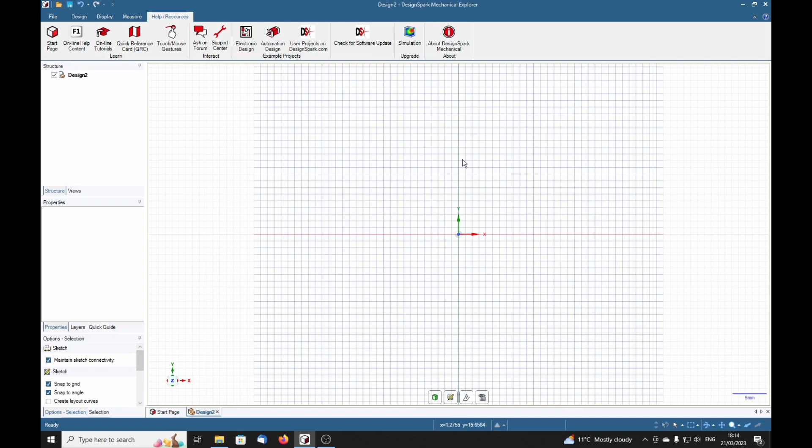So here we go. I'm going to model a Springbok 5-inch gauge model loco, and one chap remarked that he liked my driver wheel that I made a few weeks ago, and asked would I do some more on locomotives. So he will go with this one. So we'll go to our DesignSpark, and I've noticed no differences in here. Nothing stands out as being different. So we'll just continue and see how we get on.

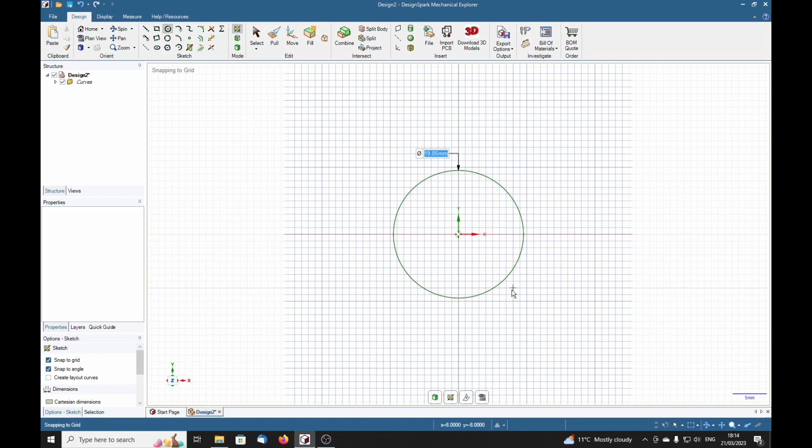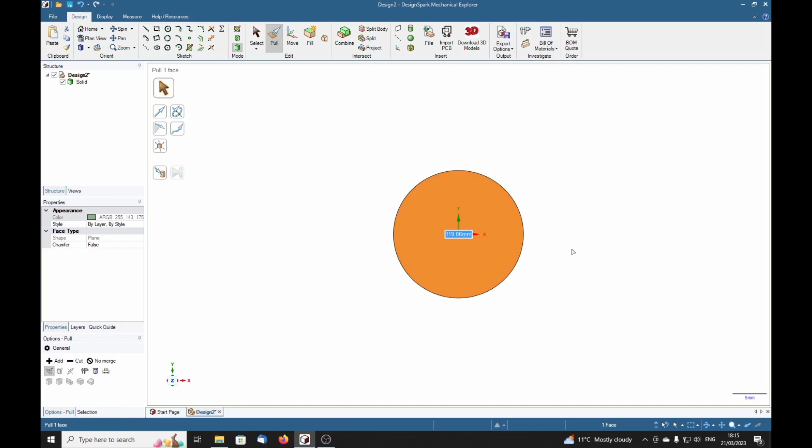I'm going to start with a circle. Now this axle main diameter is 3/4 of an inch, so we'll say 0.75 inch. Pull. 4.6875 inches. Let's have a look at that. Yes, that looks quite reasonable.

Now there's a couple of bearing parts on the end here, so it's like another circle. Now I've noticed, right, we've selected a circle, but the cursor does not have a hatch in it. So does that mean we can draw straight on here? Let's try it. Well, that looks alright.

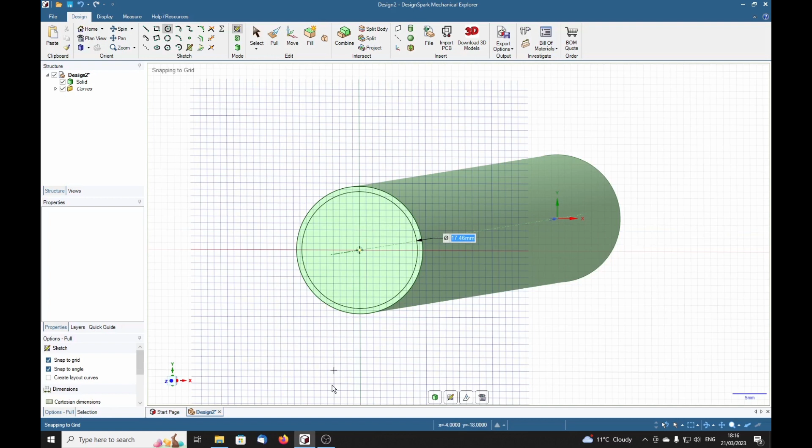And this needs to be 0.6875 inches. Okay, pull. And 11/32 long. Oh, what is 11/32 as a decimal? Point 343. 0.343 inches.

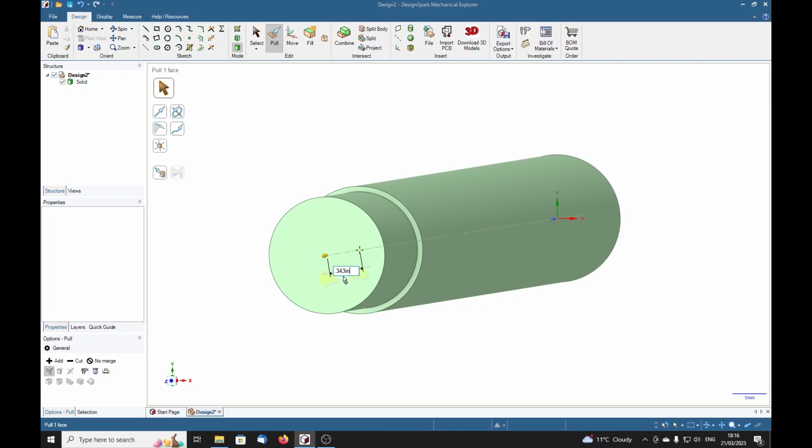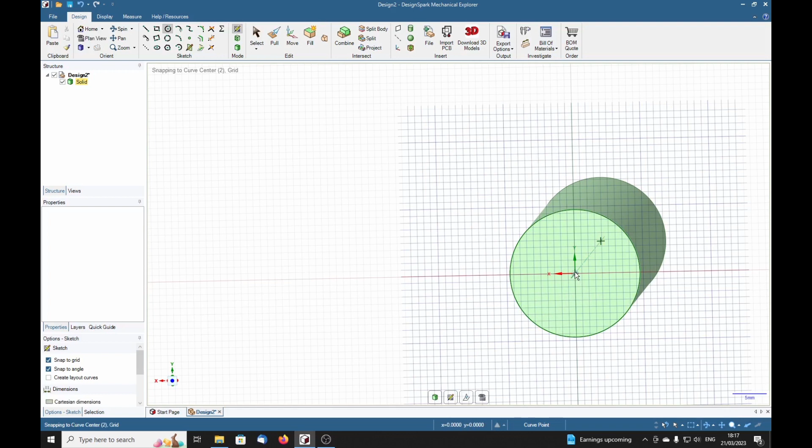Similarly on here, a circle. Oh, we have got a hatch in it. Wonder why it didn't have a hatch on the other end. Again, 0.343 inches. No, wait a minute, this is diameter 0.6. Come on, 0.6.

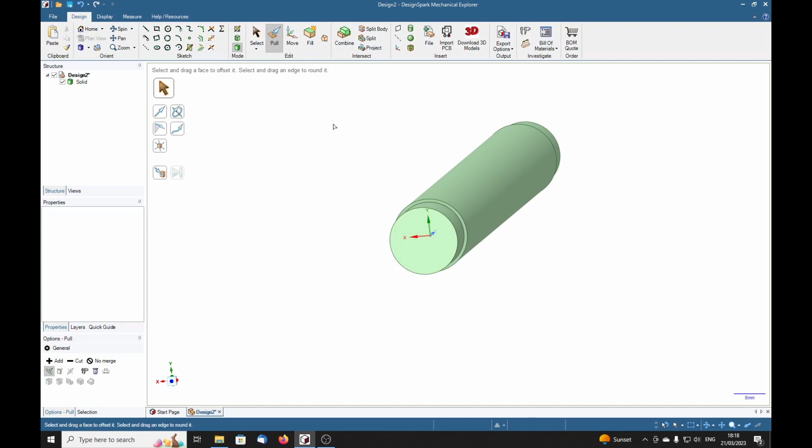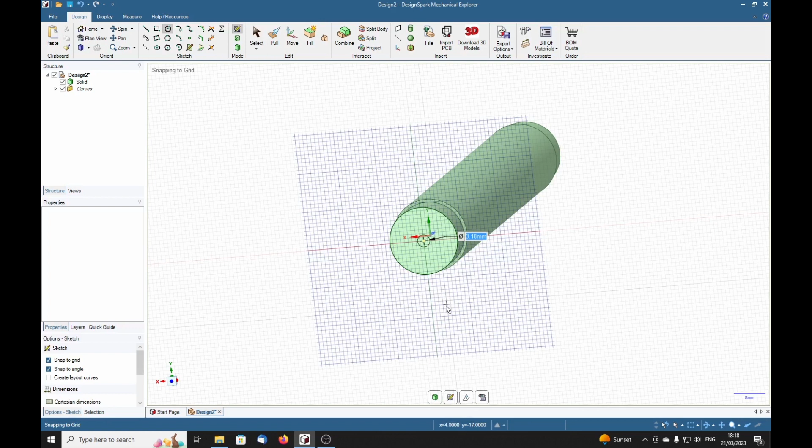So 0.125. Let's pull. And we'll drop that down about 3/8, 0.375 inches.

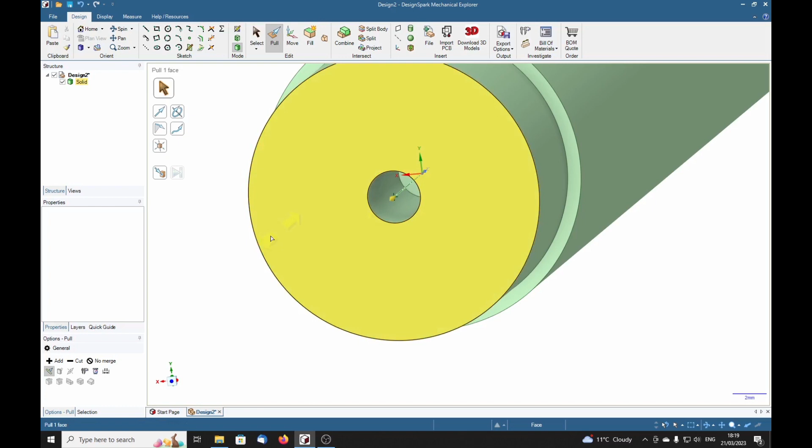Now to make this into a center drill type hole, we are going to use the pull tool. We'll select that bottom corner in there, make sure we've got the chamfer down here, the chamfer tool, and we'll say 0.0625 inches.

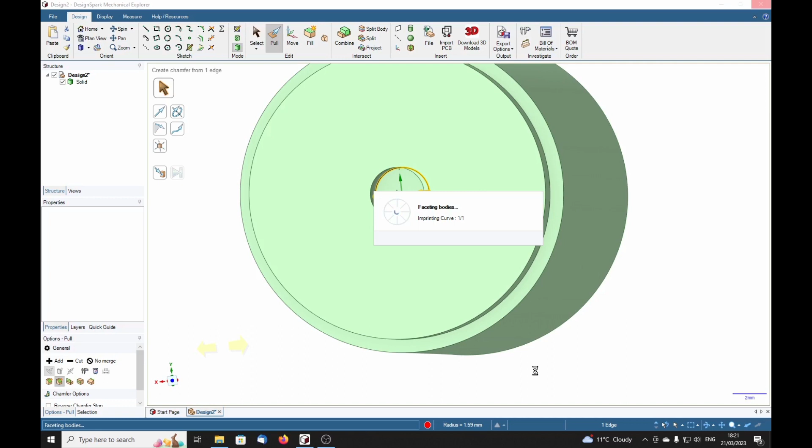Oh, this is new, normally it's pretty quick. Oh, this is not good. We can't be waiting all this time for a simple chamfer. Wait a minute, we've got something going on down here, look. This red thing looks ominous. Ah, right, it appears to have done it. Yes, I think we've got a drill point type recess in the bottom of that, but that took a while.

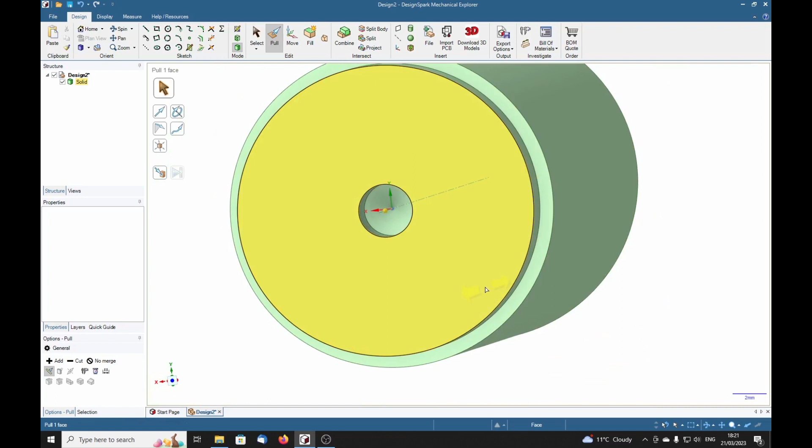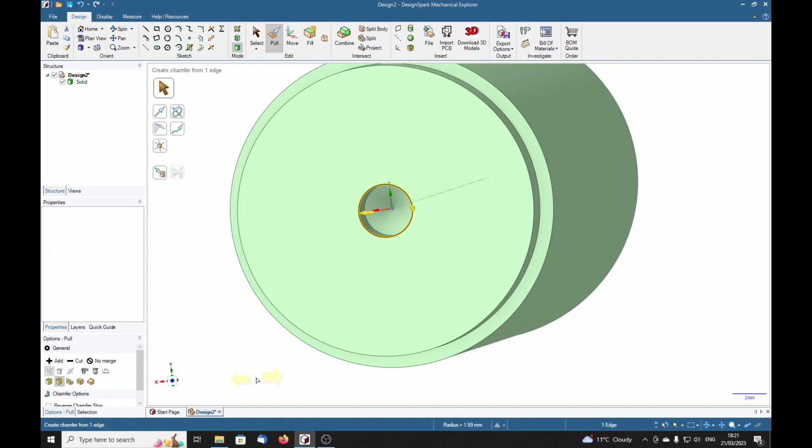Now we want a chamfer at the top. Let's see if this is going to... Now we've still got the chamfer, 0.0625 inches. Return. Oh, well, that's better, that's better.

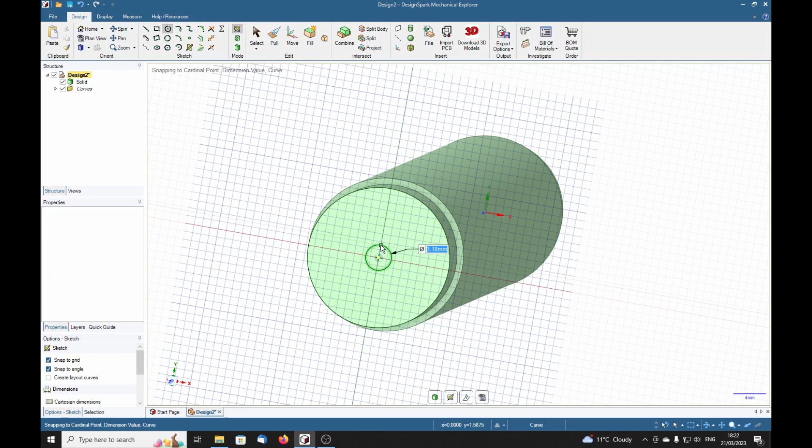Try this again on this end. Circle. Ah, right, yes. 0.125 inches. Pull. 0.375 inches deep. Okay.

We are... and we've got... oh no, we want to make sure we've got the chamfer. Right, that's the chamfer, on 0.0625 inches.

Maybe it doesn't like doing this right near the center of the hole, bottom of the hole. Maybe we need to find some other method of putting the pointy bit at the bottom.

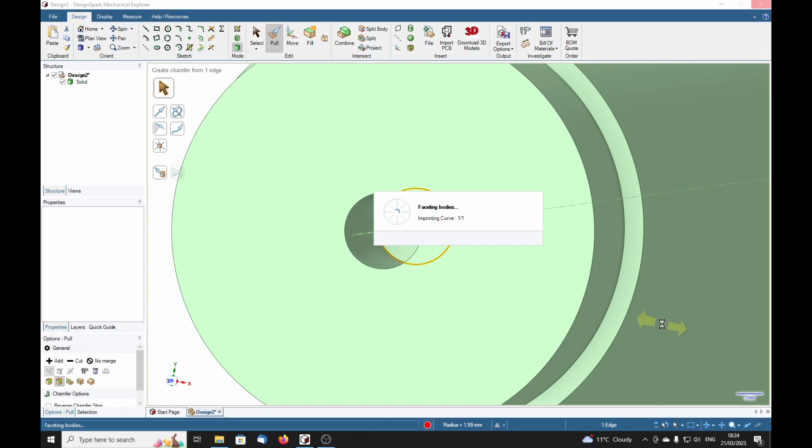That'll be the phone. Yeah, hello. Hello. Yeah, I was. I'm all right, in the middle of doing another video. Okay, bye.

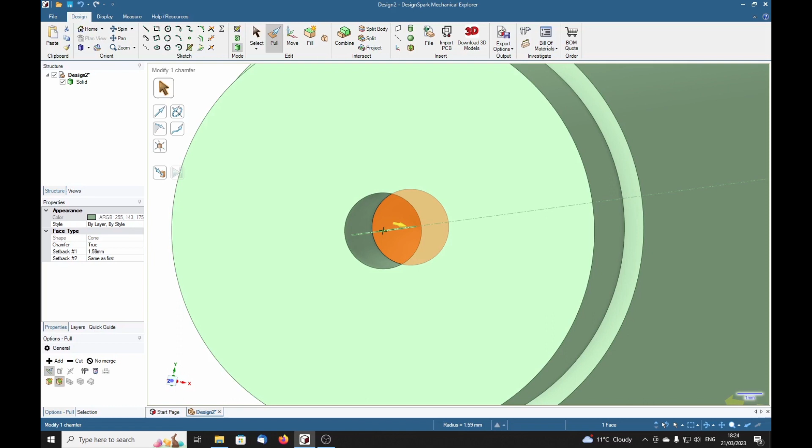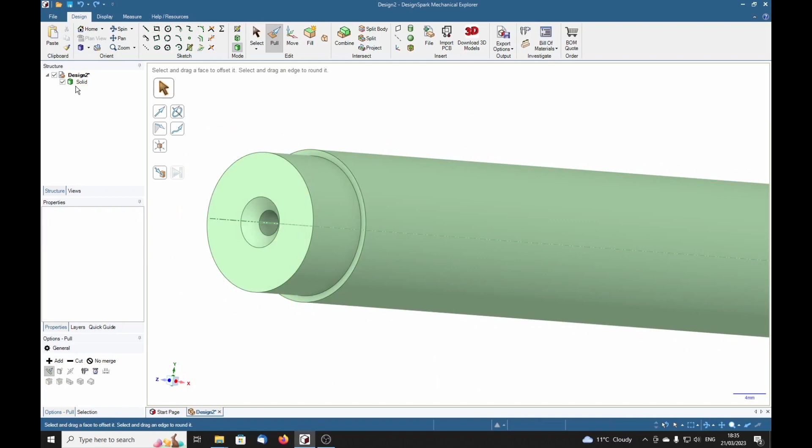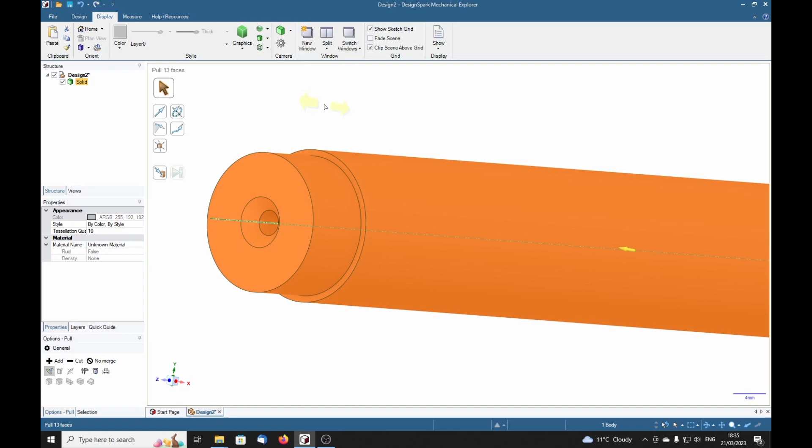Okay, all right, that's virtually finished, apart from some cosmetic bits and pieces. I think we might as well colour - let's make it out of steel. So we select the solid display color, and we'll select this light grey. Then make it out of polished metal. Finish, high gloss. Sort of a gloss.

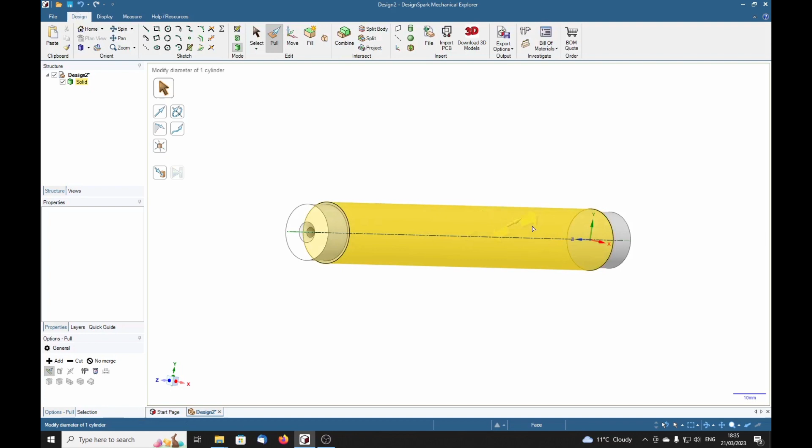Now then, I'm going to test out the dimensioning, I think. So we want to orientate that nicely, because there's one aspect of the dimensioning that I'm interested in. I've seen on other videos that the dimensioning can always be facing you the right way around. Even if you turn the part around to face the other way, the dimensioning reorientates itself to face you. Now I want to check that out.

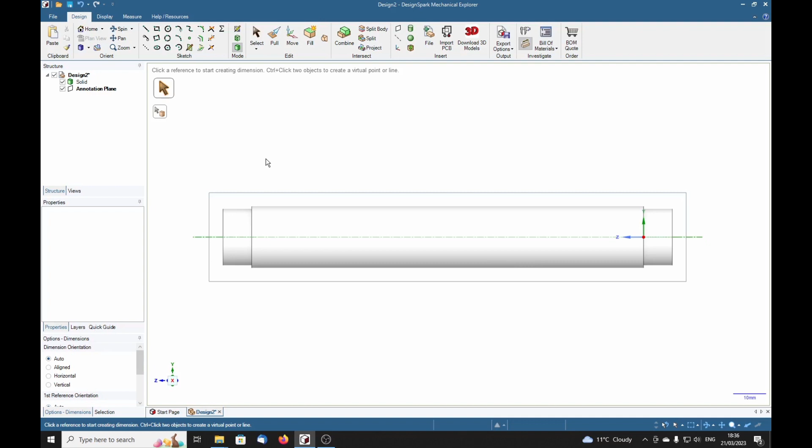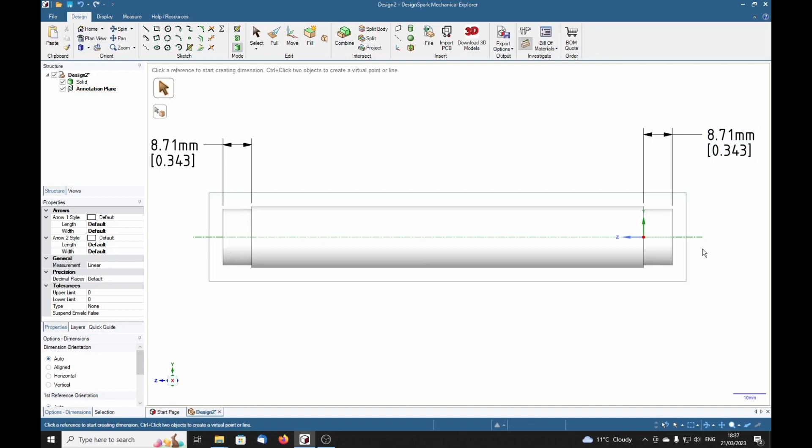So we'll have some dimensioning. There's the dimensioning tool. We'll click the center line to get an annotation plane. And we'll stick one in here, and another one here. You will notice that I've got 2 dimensions here, dual dimensions - thought I'd play with that as well. Millimeters and inches. Might as well put this in.

Strictly speaking, you should put the whole length in as well - well, not as well, but rather than this middle part, put the whole length in. Might as well make them match up. That's nice, that seemed to lock into position there. That was nice.

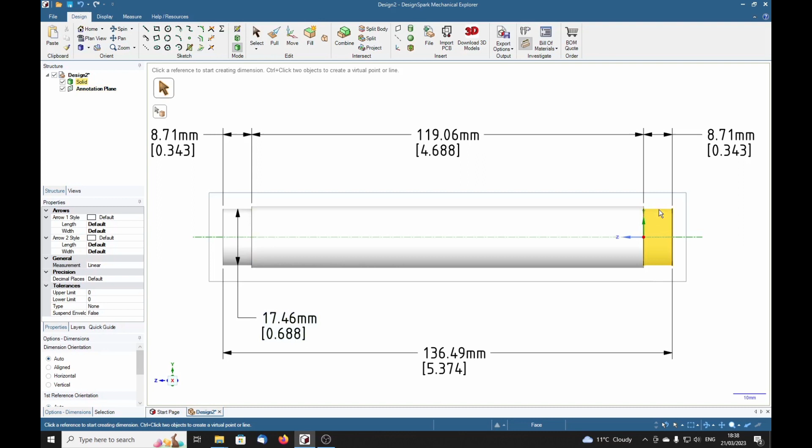So it's just the dimensions now, the diameters, so I'll click that down there. Yeah, 0.688 - how it's rounding down to 3 digits, that's really 0.6875.